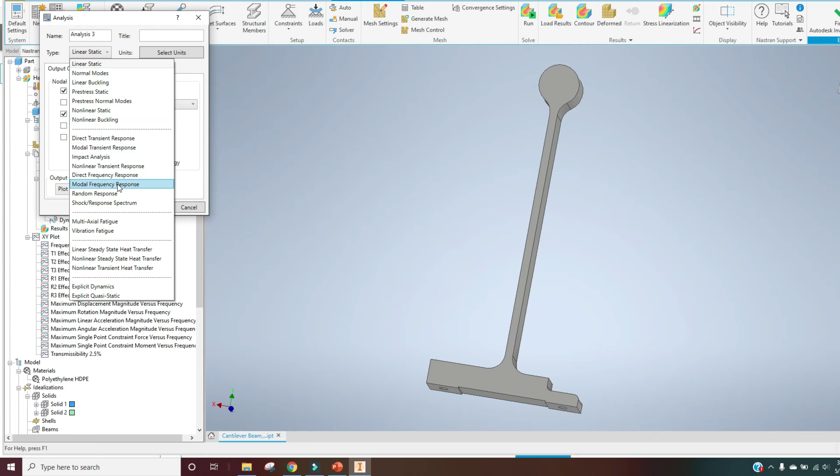The amount of movement that we'll see at this mass during resonance is a function of damping ratio. With very high damping ratios, this really won't amplify that much relative to the base input, but with low damping ratios, we're going to see this swing a lot further. And I'll talk a lot more here in a little bit about the specific analyses we can run to characterize that, but let's keep going on with testing so we can see what isolation looks like.

If I continue to increase the input frequency, we'll see that the mass is no longer being amplified in movement, and it actually appears to almost stand still when we view it in slow motion. This is because we're now entering the isolation region. That means that the transmissibility is actually less than 1. In other words, if I move the base 1 inch, I'm not going to get even close to 1 inch of movement at the end of the mass because it's vibration isolated.

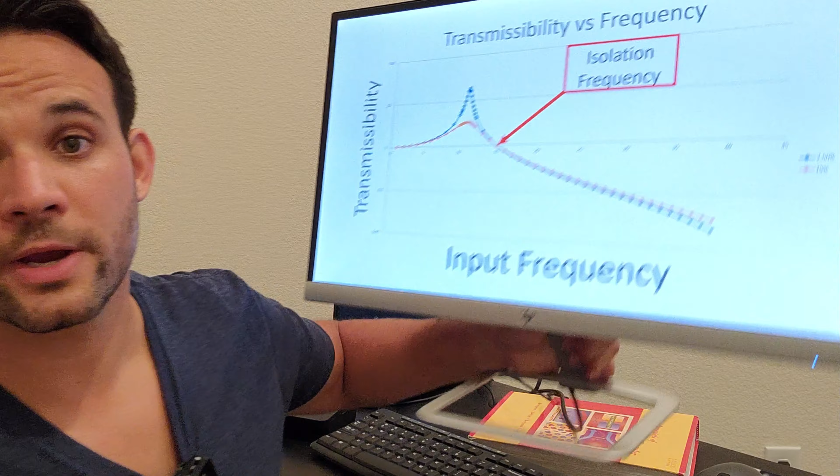Now, I want to introduce you to a chart that compares transmissibility versus the input vibration frequency. On the vertical axis, we have transmissibility, and it's the ratio of the output to the input. In our case, that's just how much further the mass at the end moves than the base input, or how much less if it's less than 1.

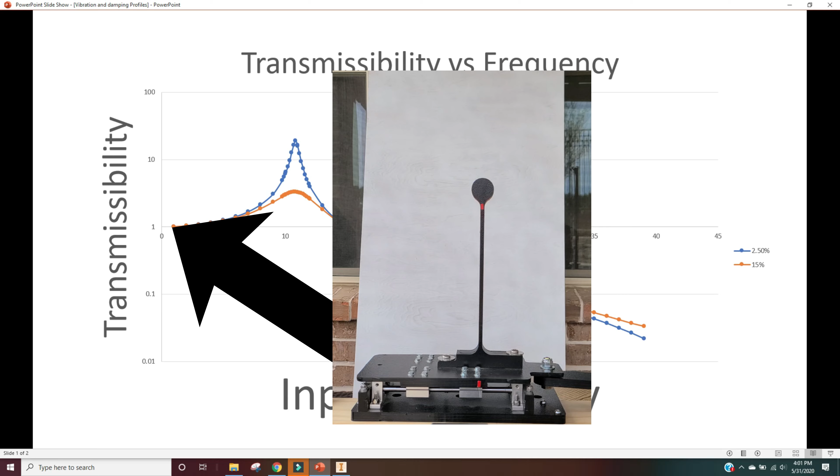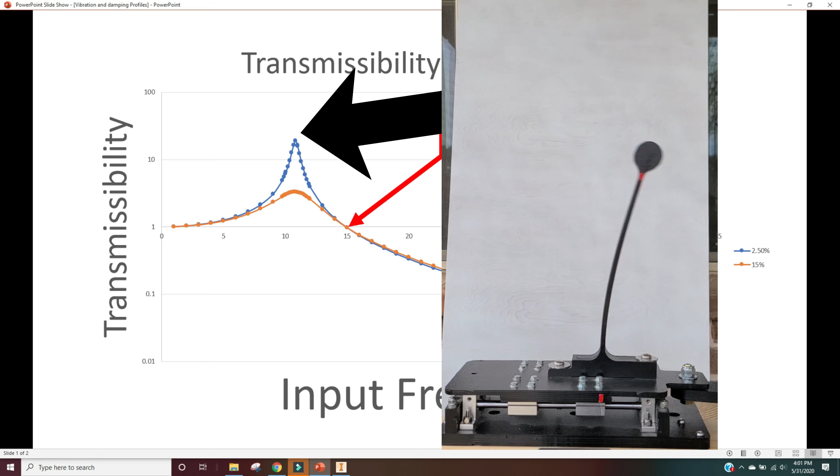So a transmissibility ratio of 1 that we saw at the very low frequencies means that the mass and the base are moving together. But when it was resonating, it had a very high transmissibility because the movement at the mass at the end of the rod was amplified to a much greater amount than the base input. And then it was the exact opposite whenever we were isolated and the mass was barely moving relative to the base input.

And this is exactly what I was doing with the FPV camera mount on my RC boat. I was isolating the camera itself from the base input vibration with those 3 little silicone vibration damping balls you saw between the camera mount and the base. Isolation frequency is theoretically defined as the natural frequency times the square root of 2.

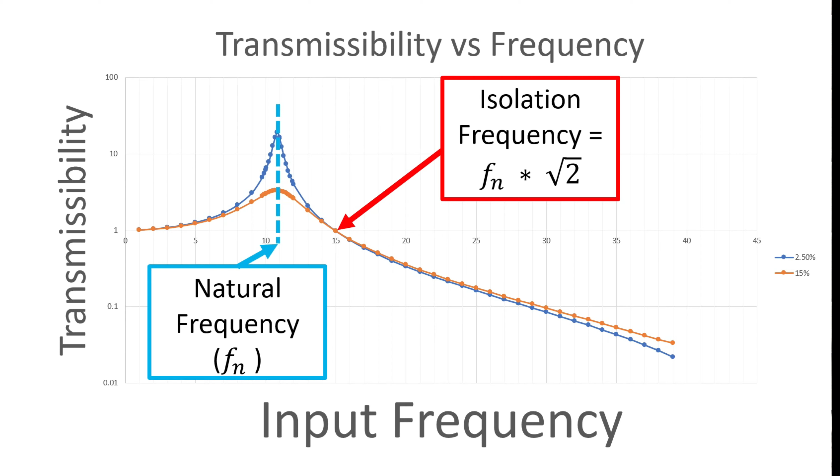And with that, we are now ready to take all this awesome new knowledge and run some vibration analyses. I'm going to be using Inventor Nastran, and they call it something like a Modal Frequency Response Analysis. But ANSYS and SolidWorks both call it something like a harmonic analysis or a harmonic response. I don't remember the exact verbiage.

Regardless, they all basically characterize the response of a system to a sinusoidal input. And in our case, that input is displacement of the table with an increasing frequency. But you can also use acceleration and force and other types of loads to run the same analysis. It just depends on what you're actually analyzing.

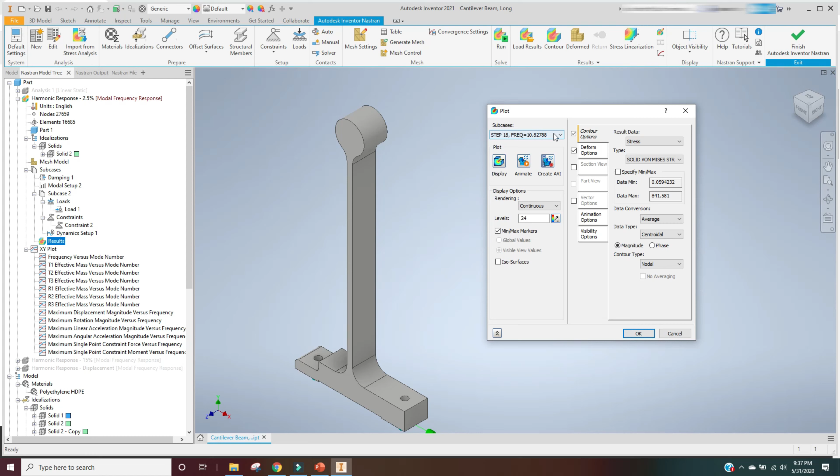From this analysis, I can pull stress at a given frequency to understand how much of an impact resonance and isolation have, or I can view graphs that show me the transmissibility at a given point. This is very useful in understanding how different regions of the structure respond to vibration, and also if I want to compare how different damping ratios affect the dynamic response of a system.

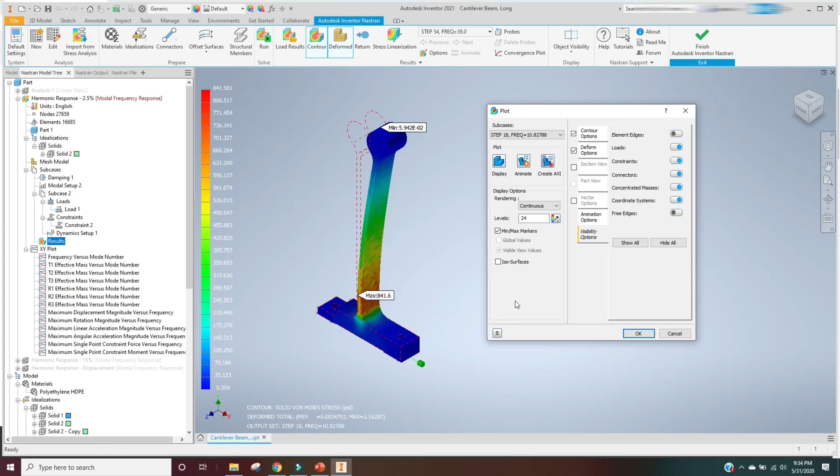And on that note, let's go compare some different damping values and see how it affects the response of the mass at the end of our test piece. In this first example, I've only got 2.5% damping, and the max stress at resonance is 841 psi. If I increase damping to 15%, this max stress goes all the way down to 140 psi. So more damping, more better, right? Wrong. Sometimes. It really depends on what your input vibration profile looks like.

In the case of my RC boat, below 20 Hertz, it's pretty low amplitude, but above 40 Hertz, it jumps in energy quite a bit. So let's compare what transmissibility curves look like between 2.5% and 15% damping on our test piece. We can see that the transmissibility is way lower at resonance for the 15% damped case. But remember that the vibration profile for the RC boat already was pretty low energy in this frequency.

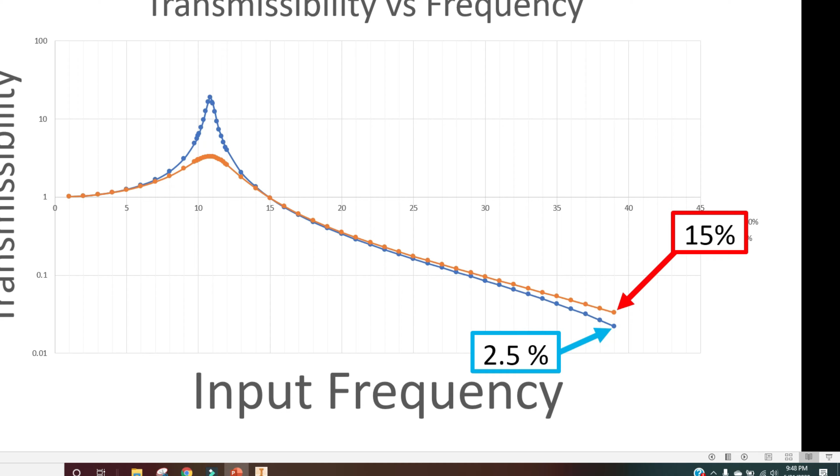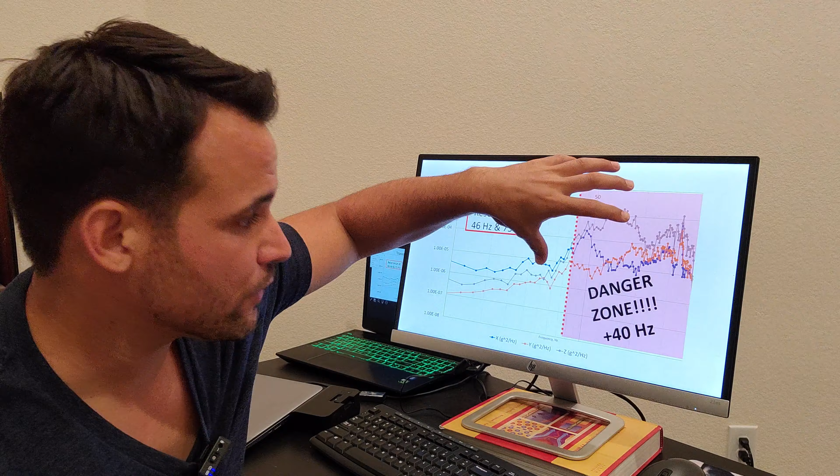But if we look at the transmissibility above the isolation frequency, we can see that the 15% damped case is always higher. And the higher the damping you have, the higher that gap is going to be between a lower damped value. So when it comes to our RC boat camera mount, that means that the higher the damping value we have, the more of this high frequency energy we're going to transmit to the system.

I'm not saying that the 15% damped case is worse. To understand which is truly the best case, we would have to run something like a random vibration analysis, but we're definitely not doing that in this video. That'll come at a later time. Let's continue on just understanding the basics of damping and isolation.

Now, if you're wondering where the damping ratio or damping values are defined and controlled, it's usually in either material selection or the assembly selection. Metals generally have really low damping, like they can be below 1% damping, and some rubbers can be above 20% damping. So silicone is a very common material to use for damping, as well as some other types of rubbers.

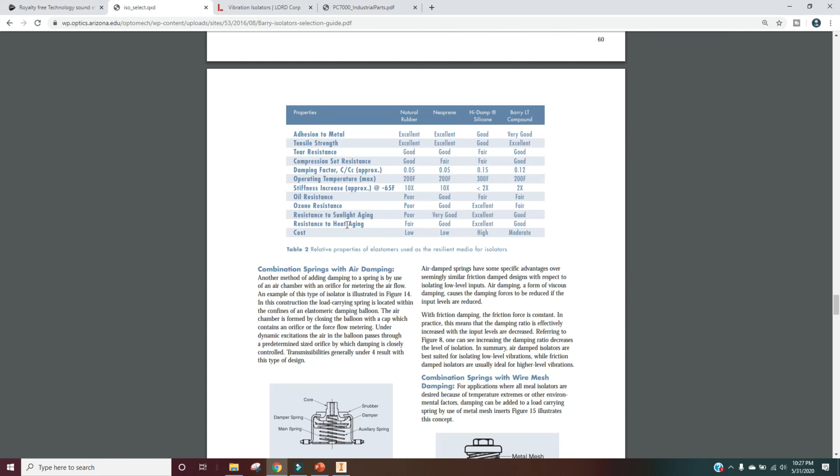And if you're looking for off-the-shelf vibration isolators, they'll usually publish what the damping value is. And they'll also publish a range of temperature options and all that. In the case of the FPV camera mount, I used off-the-shelf little silicone vibration damping balls. That was a combination of cost and understanding that this was a good trade-off between a medium damping ratio, but not over damping my system.

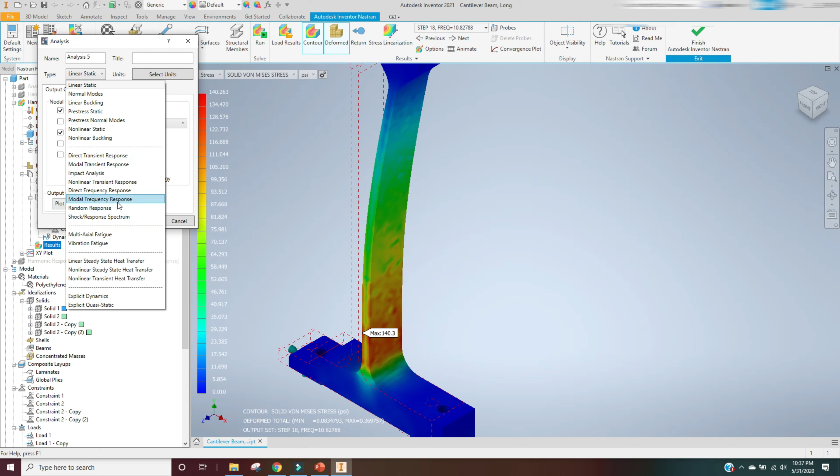You can also use friction to damp things, so wire rope isolators are a good example of this, and other slip plates will damp a structure inherently. Now, if you want to see a super fast overview of how I set up a Modal Frequency Response Analysis in Inventor Nastran, let's go. First, we create a new study and select Modal Frequency Response. Then you select the acceleration box in the output controls and hit OK. Create a new idealization of the part if you haven't already done so that you can create a mesh.

And you want your mesh to be fine enough so that it can get good resolution for the results, but not too fine because these studies take really long. Next, you're going to set your damping values. Your damping values are based on material. Here, it's 2.5%. Hit OK.

After this, we go into our modal setup where we're going to define our minimum and maximum frequencies for the study so that we cover the entire range of interest. After that, we're going to add a load, and in our case, this load is going to be an enforced motion. The exact enforced motion type is going to be selected as displacement, and we're going to apply that displacement to the feet that are mounted to the table on the bottom of the unit. We're going to set that displacement to 70 thousandths because that's how far our table moves on each stroke.

Next, I add constraints to the exact same faces that we put the enforced motion on, and we call those fixed so that it treats this load as a base excitation. Next, we go to the dynamic setup to define a frequency range, and we're also going to define the total number of points in that range. After that, I'm selecting the option to spread around each mode, defining the minimum and maximum frequencies again, and the total number of points to spread around each mode so I get concentrated data in a modal response, based on the percentage spread. And then all we have to do is select Run.

I can add new plots when the results are done by selecting XY plot, going to the node that I want to pull results from, selecting that node, and making sure to select the exact results I want. I want displacement in this case, so I'm just going to show XY plot, and this is the data I get. If I want stress results or anything else like that graphically, I select the frequency that I want, go into display, and it's going to show me the stress or displacement or whatever it is I care about for that frequency specifically.